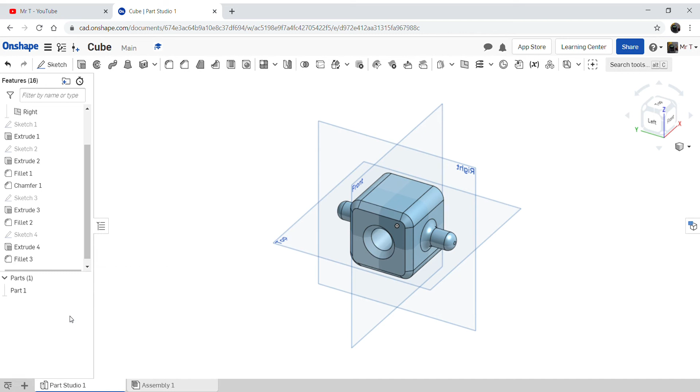So that is going to open up a new tab for us. Part Studio 1 is what we were working on to start off with. This is now Part Studio 2, so we get a new setup of these planes for us to look at. And we're going to work in exactly the same way.

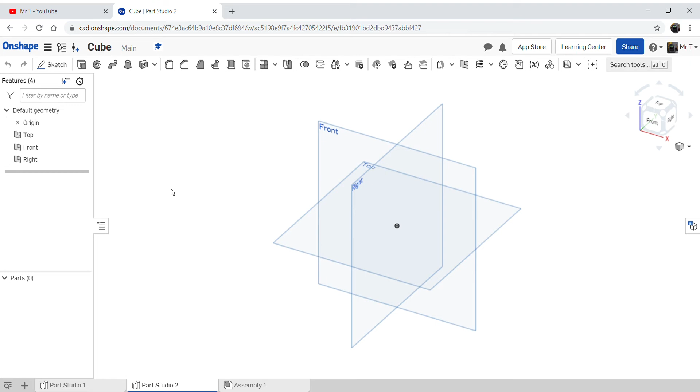So this time we're going to be using the front plane, so I'm going to select that one. So we're going to click on that, click N for normal view, and that's going to bring us in there.

And we're going to need to create what we would call a profile. So this is not a complete image of something, but it is, if we were to look at something flat on, and we're looking at half of what the flat view would look like, and hopefully you'll understand this as we go through.

So we are going to start off, and we're going to do this to the side of this line here. So we're going to use this as our vertical axis, and we're going to do it to one side of that.

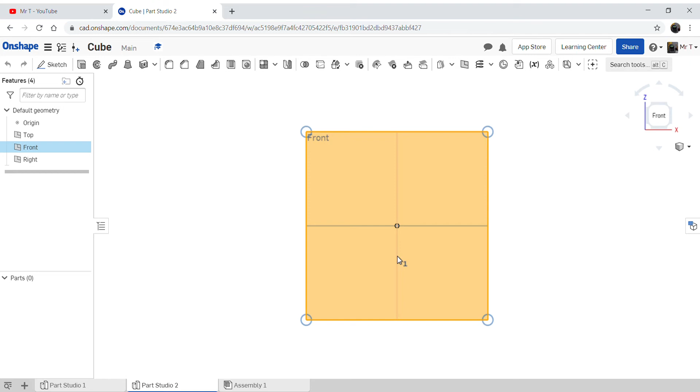Now we're going to use the sketch tools again, and obviously we don't have a complicated shape in here that we can sort of add. We could use lots of basic shapes, add them together, and clip bits off, and that would look a lot like this. So for instance, if we were going to put a rectangle in there, and another rectangle in there, we can do that, and then use this trim tool to remove the lines we don't need. That would get us something that looks a bit like what we want.

Now that's a little bit overly complicated, truth be told, so we're not going to do that. So I'm going to show you the other way to do it. I'm going to Control Z that away. And staying in sketch mode, we're going to pick up the line tool.

And we're going to try and do these as accurately as we can as we go along, that's the best way to do it. So going to click here, doesn't really matter where, but I'm going to use this long line to help me. The first line wants to be roughly 40mm long, so I'm going to draw that, and I'm going to dimension that.

And we're going to dimension these as we go along because that's quite important that we do that. So I'm going to just dimension that one to 40mm. I'm going to draw myself a line on here. Now obviously these connectors are useful because they will automatically grab onto these, so I need to get my line tool back again.

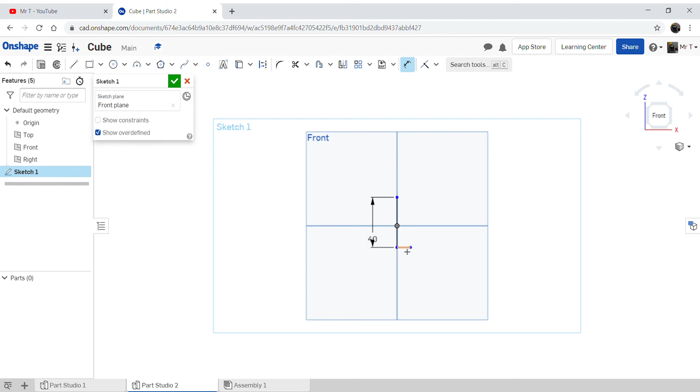So again, we get the middle bit, make sure that goes orange, and drag that out so that we can set that to 10. Then we're going to put a line at the top. The top one needs to be a little bit longer - I keep forgetting to select my line tool, so if you make that mistake then it's okay, we're all in it together. We're going to click that, and drag it over. That wants to be a little bit longer this time, so we're going to make that 15.

And the last line I'm going to draw in will be 10, so we're going to get Coincident there, click that, dimension that, 10. I know this seems overly faffy, but it's worth it in the long run, so we're going to do that.

Now obviously I'm not going to just join those two bits together, so I'm going to draw a little wedge in there. I'm going to go across, that's going to be about 5 millimeters. Now you might find it difficult to zoom in on particular parts, so this is where...

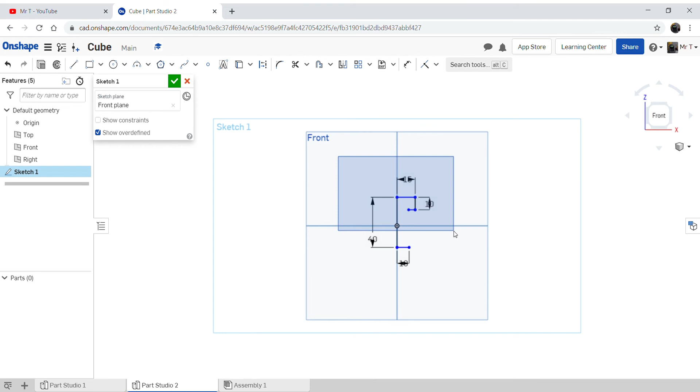If we take off that dimensioning tool, we should be able to select everything we've done so far. And for those of you that are working on a laptop, certainly, if we zoom to selection, it will zoom into the bit that I'm actually looking at. So I can go back into my sketch and dimension them now. So I can dimension that one.

That's going to need to be 5 millimeters. No, it didn't want to let me. That'll be 5 millimeters. We'll try that again. There you go. And then the last thing.

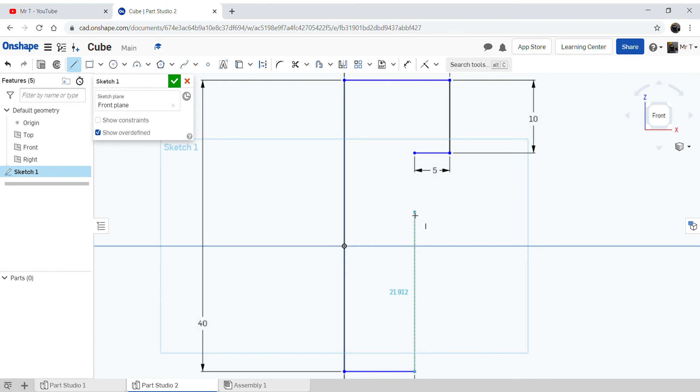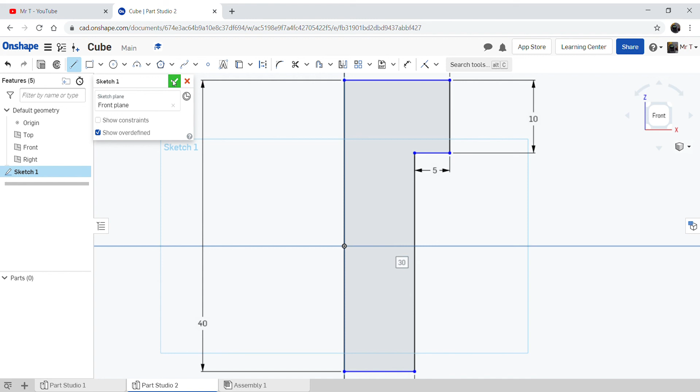So if we put Coincident there, now this will try and snap to certain things, and if it's vertical, it will be most happy. So we'll go to there and then click on that Coincident to finish the sketch. You can see now that it's done a little grey shade in here. That's purely because it's realised that's a closed shape, and once you've closed the line, then that will work for you. So that will get us our particular shape.

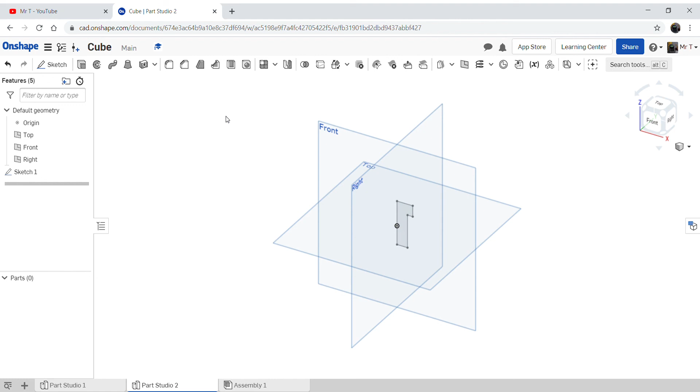Okay, so now we need to do the next operation. We're going to need to revolve this, so we're going to need to use a different tool. I'm just going to have a look at it in its full glory. There's our lovely shape that we've just created, and we know it's the right size because we've just done all that sort of stuff.

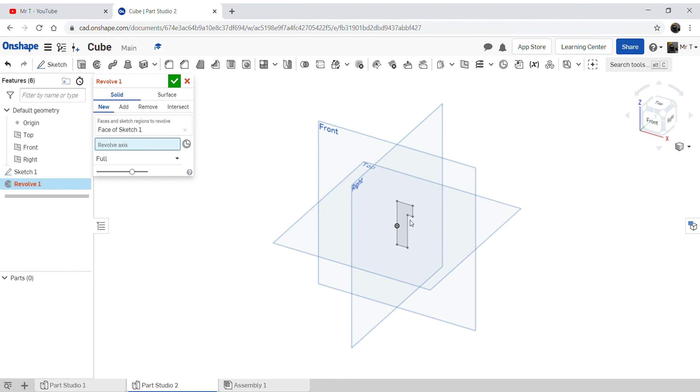And we're going to use this tool this time. This is called the Revolve tool. Okay, so we are going to go with the new one. Now it's going to ask us to click on the sketch, so that's highlighted now. Then right here, the menu is red because it's a bit confused - it wants to see what the revolve axis should be. Okay, so we are going to use that, and we're just going to select - if I just click on that, and then we're just going to select the longest line, the vertical line of the sketch, and presto, straight away what that's done is it has spun that all the way around to create a 3D part, which is nice and easy.

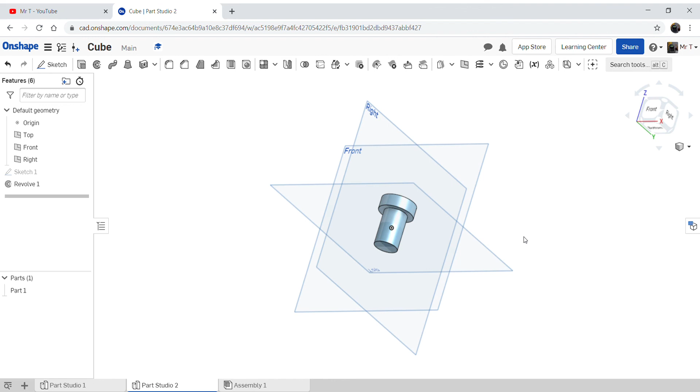So we're going to just accept that, so that's a nice looking thing. So if you were making something like a rivet or something like that to go into something, or a little peg to go into a toy or something along those lines, that would work nicely for you.

And we're just going to make that look a little bit more professional, and we're just going to use the chamfer tool, and we're going to leave that at 5 millimeters. That is the default setting for it, so that's good. And we are just going to apply that onto the right edge.

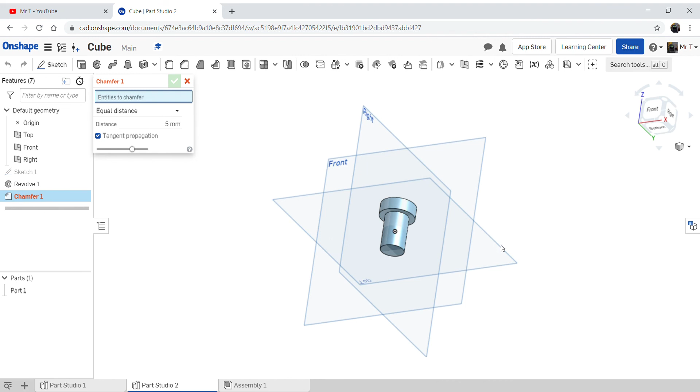Now what I need to do is just go slightly underneath here, because I want to apply the chamfer onto this edge here, which will get us a nice looking part looking much like that. Okay, so that is where we should be at this point in time.

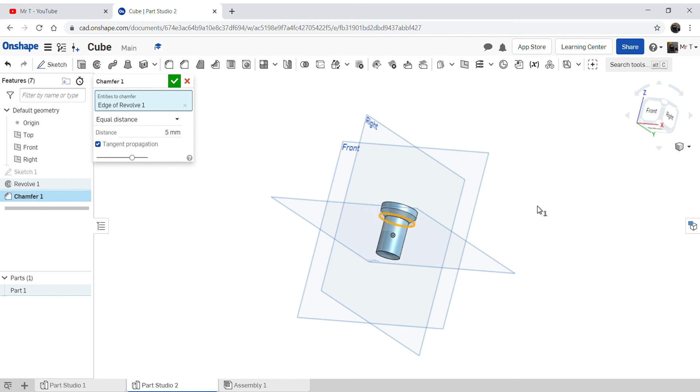And the last thing that we're going to do is just accept that one. So now we should have a part studio with our lovely funky looking thing, and then a slightly less funky looking thing, and then in the next video I'm going to show you how to join those together. Okay, I'll see you in the next one.